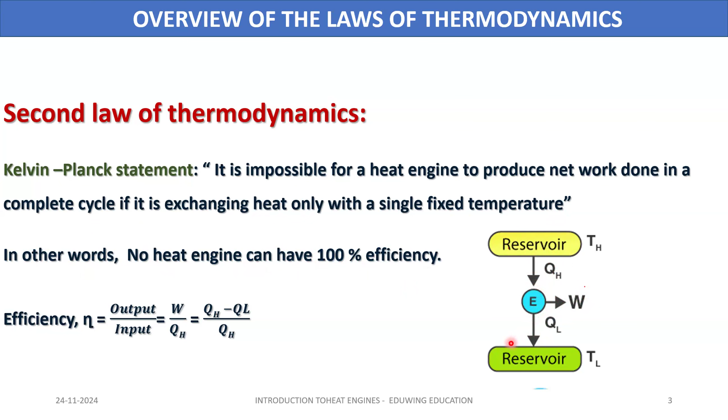So as we studied in the first law of thermodynamics, the PMM1 is known as the perpetual motion machine of kind 1. That engine was producing work without any heat input. That is, it is creating some kind of energy. It opposes the first law of thermodynamics. Or it will take the work without any output in a cycle. That means it is destroying some kind of energy. That was PMM1.

So PMM2, or perpetual motion machine of kind 2, is another type of imaginary heat engine which opposes the second law of thermodynamics, or the Kelvin-Planck statement. It's an imaginary engine operating in a cycle, which is receiving heat from a body or reservoir of single fixed temperature T, and is completely giving it out as work output.

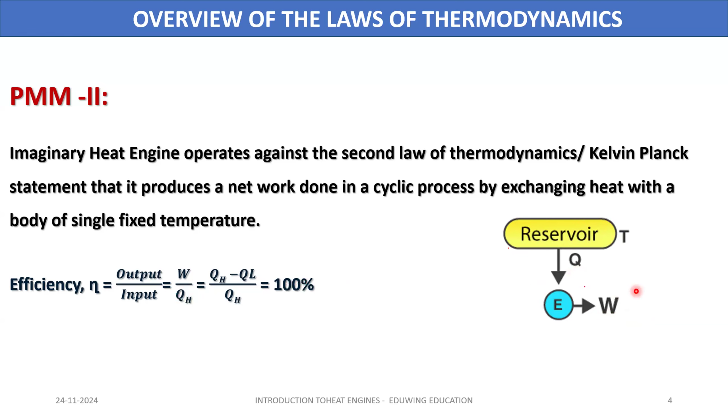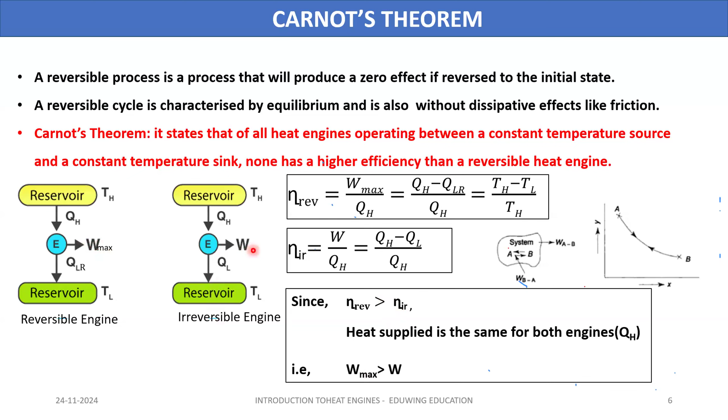All the processes are reversible. So QH and QLR will be proportional to TH and TL. So we can write TH minus TL by TH. So I have listed this here. Eta reversible will be always greater than eta irreversible. As I stated earlier, that means maximum work output will be always greater than W. Hope you understand the concept.

So we will be moving to Carnot cycle. Carnot cycle is a conceptual cycle. As I said, no natural process is a reversible process. So Carnot cycle is also a conceptual cycle. You can see. Okay. Hold on a second.

So Carnot cycle is a conceptual cycle which is having all the processes as reversible processes. As I said, what is a cycle? A cycle is a series of processes in which, after all the processes, the system or the body or the engine will return to the initial state.

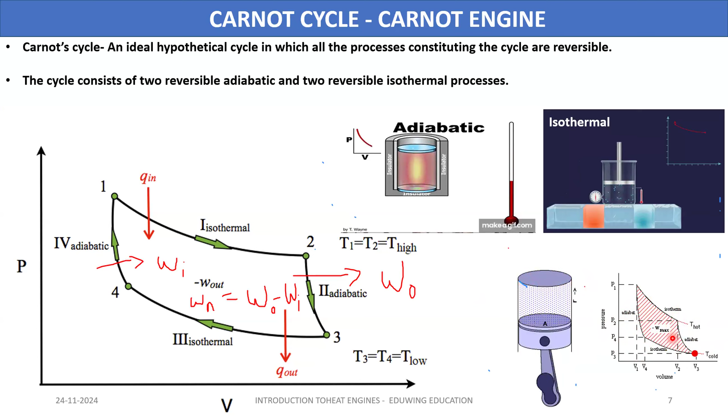In the beginning of the class, I showed you how a steam engine works. There we burn coal in a chamber, the heat is transferred to a boiler where the water is boiled, and that water turned into steam is passed through a turbine to rotate it. But the steam and exhaust gas were passed out of the system, which works as an open system.

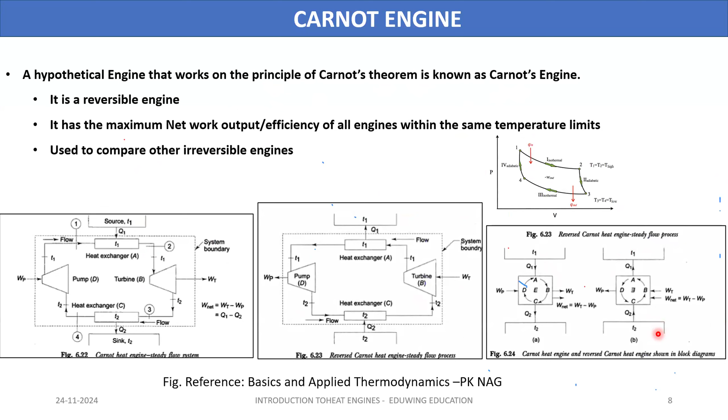Okay. Any doubt in this? No, sir. Clear, clear. Okay.

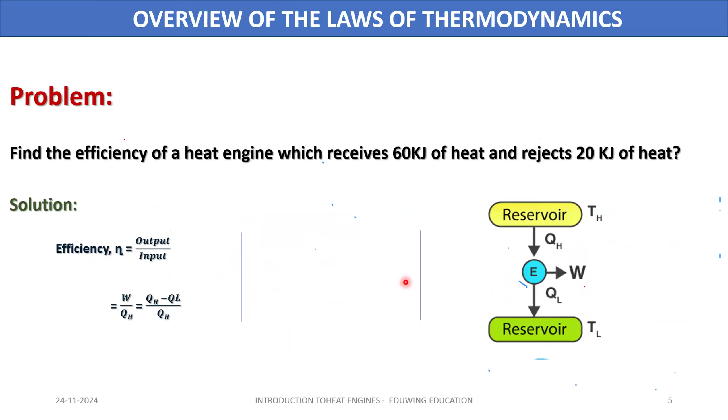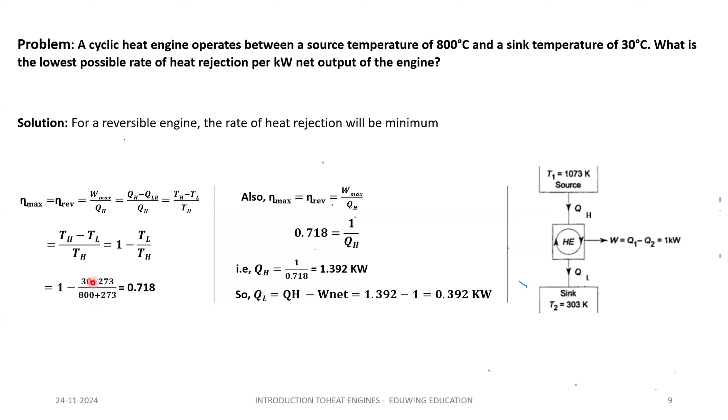So 800 plus 273. It is in degree Celsius, so for converting it into Kelvin scale we add 273. Here also it is in degree Celsius, so 273 is added to make it Kelvin. So it will be 1 minus TL by TH, where TL is the temperature of the sink and TH that of the source. Applying this equation we get 0.718, or 71.8 percent, as efficiency.

So if we have the efficiency, we can take this equation: efficiency is equal to W max by QH. From that we will get W max. QH is already...

Sorry. Sorry, something is interrupting. The session will get expired in a few seconds, because 8:15 was the final timing that was given. Okay, okay. Just a second, I will just apply this one.

W max is 1. Applying it here, QH will be given as 1 by efficiency. We have found the efficiency, so QH will be equal to 1 by 0.718, that is 1.392 kilowatt. So QL can be found as the difference QH minus W net. W net is the net work output, which is 1. So QH minus W net gives the minimum heat rejected, that is 0.392 kilowatt. Hope you got this.